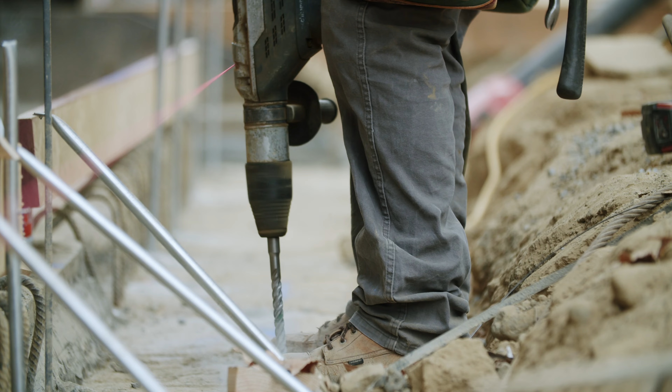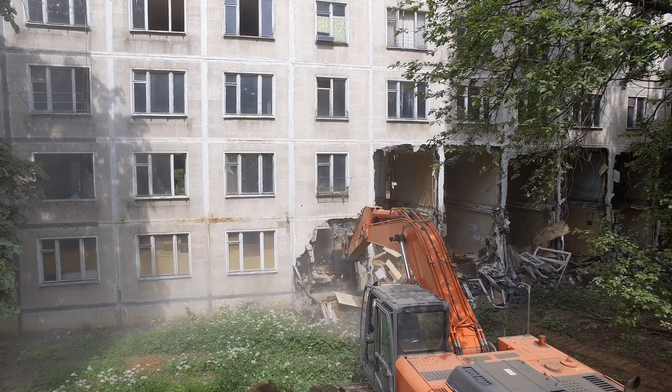When you think of a construction site, you probably think of this: big trucks, lots of noise, traffic jams, road diversions, dust, large cranes. In short, a few weeks, months or sometimes even years of nuisance and frustration for anyone who lives, works or travels through the area. And usually this situation is preceded by a lot of noisy and dusty demolition activities.

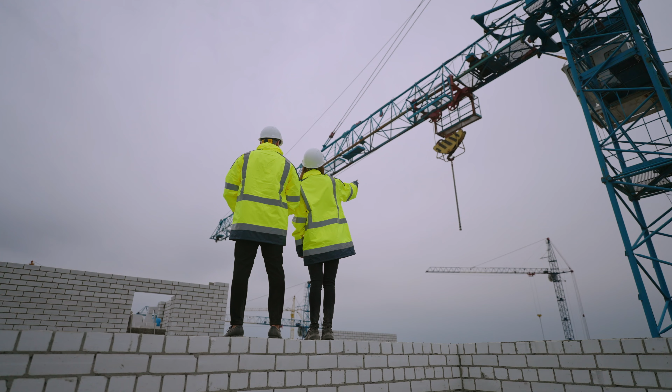Building on site has its downsides for construction contractors and building owners too, as it means all the building components are exposed to the elements, potentially being damaged by rain, wind, snow and sun. However, construction sites don't need to be that way.

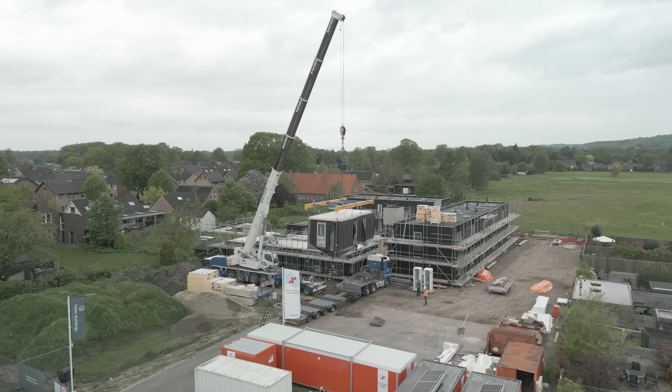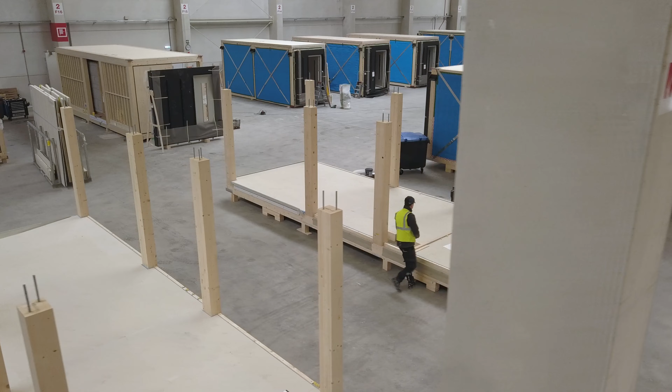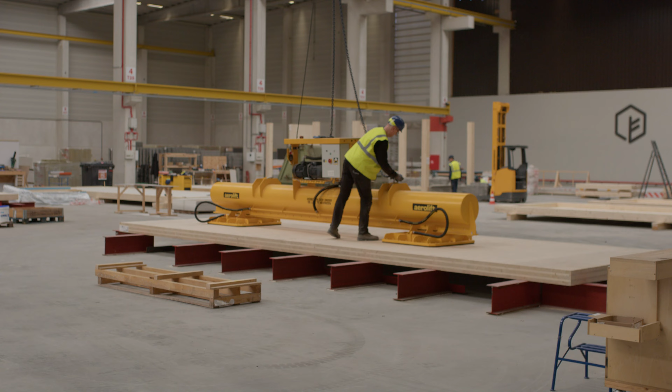Prefab construction enables us to construct buildings without the nuisance associated with traditional construction sites. In prefab construction, building parts are manufactured in a clean and efficient manner in a condition-controlled factory hall. They can be prefabricated as either a collection of 2D elements, such as walls, facades and floors, that are constructed in the factory hall and quickly assembled on site.

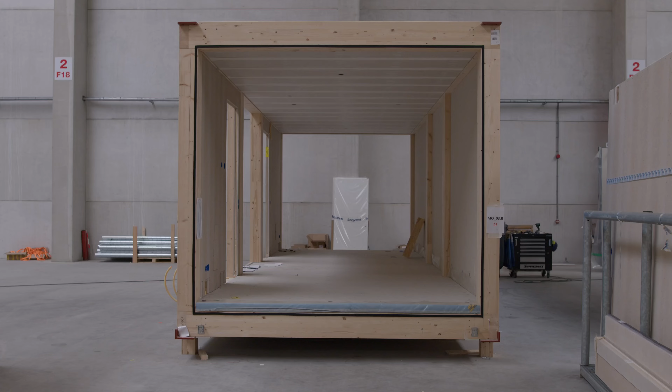Or we can even create 3D modules which already include all finishes, electrical fittings, sanitary units and, in some cases, fully fitted kitchens. This doesn't mean prefab housing has to look boring from the inside or outside. In fact, any finish is possible.

As timber is 5 times lighter than concrete and far easier to work with, it's a perfect material for prefab construction. This is why many new housing prefabrication factories are being built with a concept specifically based on timber. Let's take a closer look at how this is done.

Today we're at a modular housing factory of Lister Buildings in the south of the Netherlands. Here they produce multi-story buildings out of 3D modules made from mass timber.

Hello Vivian. Hey Pablo, good to see you and welcome at Lister Buildings. Well, thanks for having us. I understood you're going to give us a tour through the factory?

Yes, of course. Here we produce the modules made of mass timber to produce the multi-story apartment buildings. We have our own design team and the head of design is Robert, and he can tell you a lot more about the whole process.

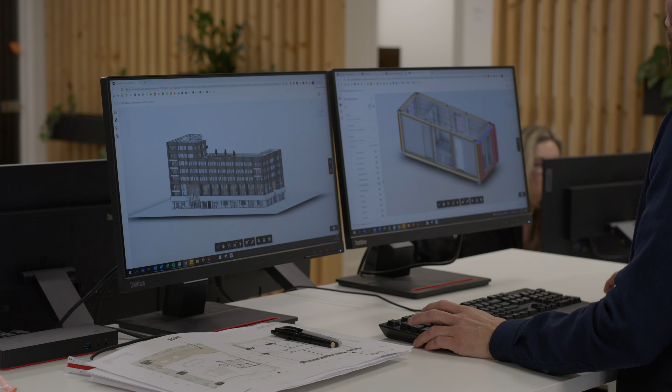Hey Robert. Hi Pablo. Hey, this looks really intriguing, what are you doing here? Currently I'm working on one of our 3D computer models for one of our projects. So we integrate all the information needed for the production process into our 3D computer models.

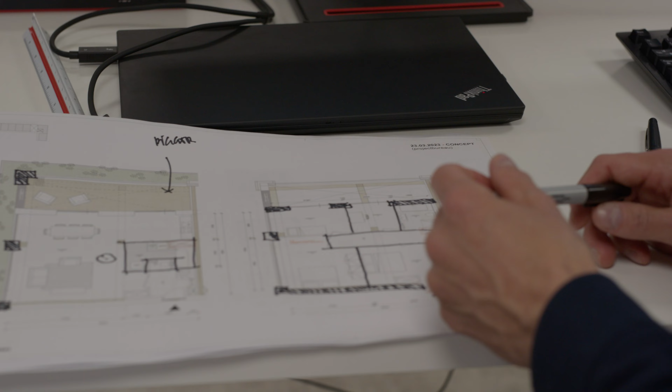But first of all we start with the sketches. We developed different kinds of floor plans for different groups of people, from students to young couples or small families to elderly people - mainly people who want to live in the city. But pretty quickly in the design process we start modeling together with our designers, engineers and production partners within the computer.

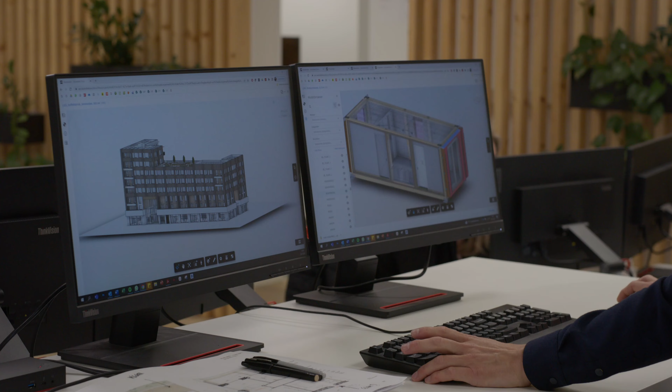And we do this in order to have a full span of control of the production process. As you can see here, we developed a fully integrated 3D model. This is the wooden post beam structure of glulam.

All our modules are made from dry mounted connections in order to be able to take everything apart at the end of the lifespan of a building. The dismountability. Yeah. This is the Koffiefabriek in Amsterdam, a multi-story timber building.

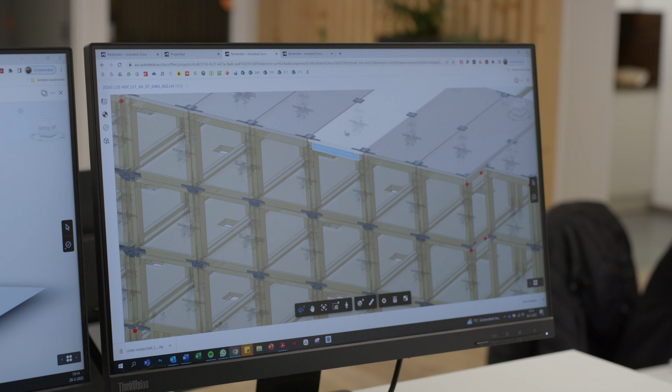We can build up to 10 stories high. And here this is the complete wooden structure of the Koffiefabriek. So these consist of all these kinds of 3D modules? Yes, it's 150 modules in total.

And you can see here we have all the posts and beams made out of glulam, and the floors are made out of CLT. And in total how many homes will be in the Koffiefabriek? 70 in total. Wow, and why did you choose specifically to build in the 3D system?

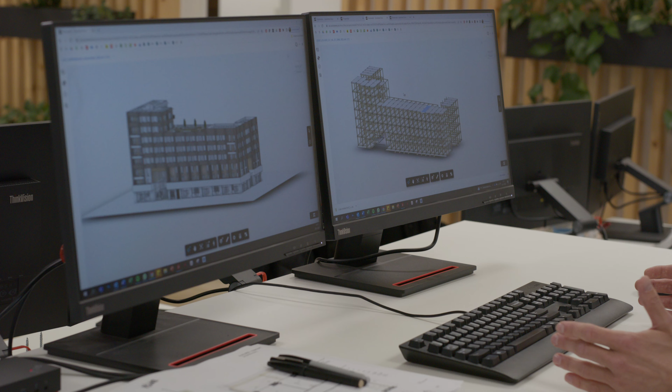Well, we built in a 3D modular system in order to have a full span of control, super good quality within our factory here in Weert, and to reduce all the assembly time outside on the building site. In that way we are able to build quicker, but also have less nuisance for the surrounding area. Wow, I like it a lot.

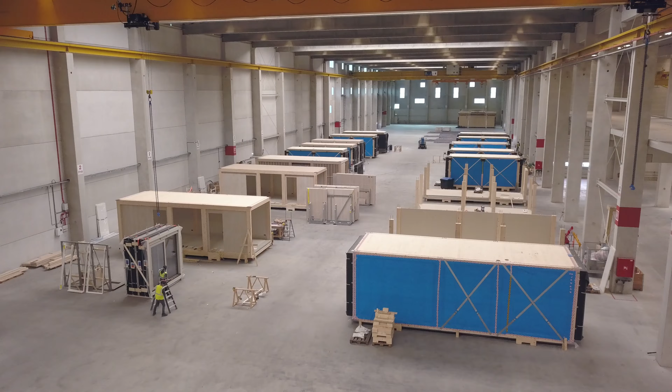So Vivian, this is where the magic happens. It's huge, how big is this hall? This hall is 18,000 square meters, and in the end we could produce more than 1,000 modules here per year.

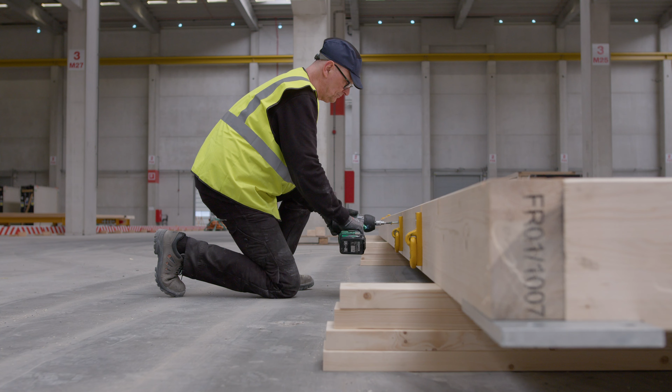What you see right here are the different working stations. In each station a specific team works on an element of the module. So what kind of elements, where do you start with? The flooring, and of course the posts and the beams afterwards, the ceiling, the wet areas of the module, the kitchen, the bathroom, the toilet.

And then every workstation does something specific. At the end of the day, our colleague from the storage room prepares all the materials for the next day, so the teams can start early in the morning, prepared with all the materials they need.

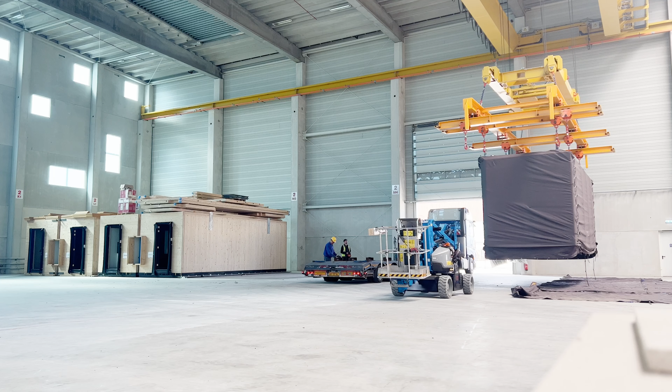And at the end you have a finalized module that goes on the back of the truck. Yes, exactly, to the building site. And then it's really amazing what happens there. You have a huge crane, it picks up the module, and within less than 10 minutes, the module is in its final position. That's amazing to see.

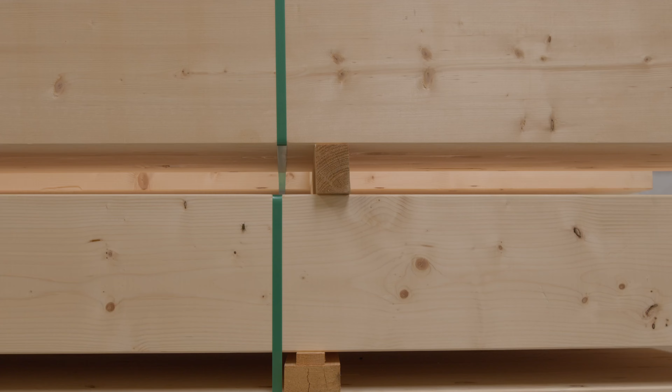We start here at the first step in the factory. This is the place where all the materials come in, and they are sorted out here. What you see here are the wooden elements of the module, which are designed and engineered by our partner CLTS from Belgium. They are experienced construction engineers of Glulam and CLT.

We also work together with Stora Enso, our supplier, and the design BIM model from CLTS goes directly to Stora Enso, and in their factory these elements are prepared. So what we saw in the BIM model that Robert showed us, all these elements and the sleeves are put there, sent over to the factory, and it comes plug and play like this. Exactly, and we only assemble it here.

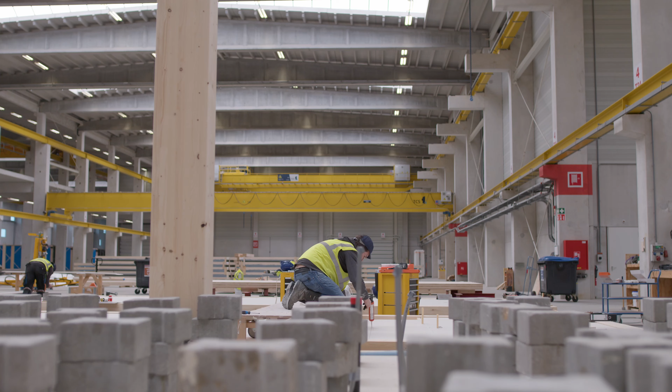Do you know where all this timber comes from? Well, Stora Enso has their own forests in Scandinavia, but also in Finland. And that's all with a sustainable certification hallmark? Absolutely. Okay great, good to hear.

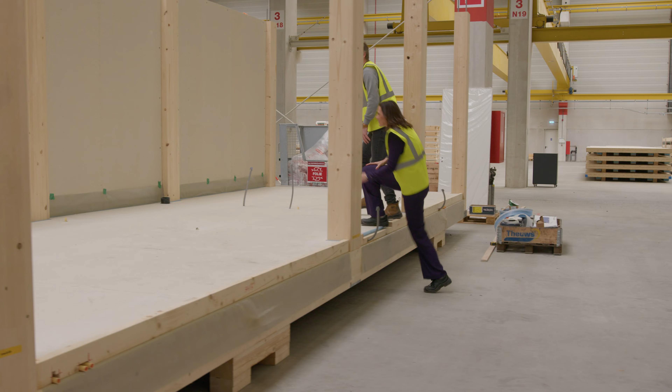Okay Vivian, so this is what a module can do. We saw the mass timber linear elements coming in, and here they're assembled in the 3D module. Absolutely, so we have the floor, we have the posts. The beams are not here yet, but they will come afterwards in the next working station.

The Glulam posts are really impressive, and you keep them inside in the final building. Is that a deliberate choice? Yes, because it adds to the aesthetic quality of the apartment, and we also know it's good for people's health if they have the feeling that they live in a building with natural materials. It's also in line with biophilic design principles, so it's really important for us.

Circularity is a very important theme nowadays in the construction industry. This 3D modular system of Lister, how does that score in terms of circularity? Well, circularity is one of the great benefits of our system, and for example we use dry connections and plug and play elements. My colleague Rick can tell you all about it.

He's our circularity manager. So Rick, hi. Good to see you here. So you're the expert, can you explain a little bit more, for example how circularity works on the Lister system? We actually make a circularity passport for every building that we make, and we score our building on 6 different topics, so we can have a nice overview of the performance of our circularity.

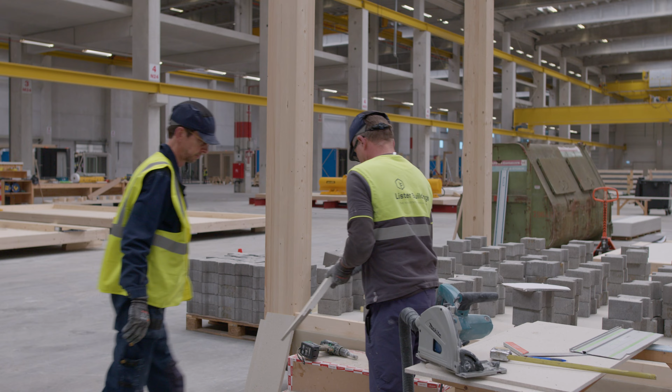Typically in these multi-story apartment buildings, you need to add mass to meet acoustic requirements, so usually they pour a concrete floor. So how did you manage that in the Lister system? That's why we use these kind of bricks. They are dismountable, so we don't pour any liquid concrete. This makes the system way more circular, and these bricks can be taken out after the whole module is disassembled.

Right, and so then you have the CLT floor that can also be reused, because they're not connected in a wet way. Exactly, that's another example of the circularity of our module.

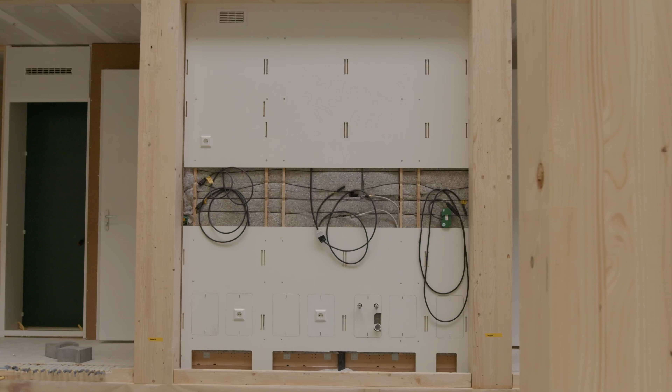But you mentioned there's also circularity included in this whole bathroom module. Yeah, you can take the whole bathroom out of the module. If you want to take it out, that's not a problem, and you can reuse the whole bathroom in a completely different way. And the rest of the bearing structure remains intact.

100%. Very nice. So this is our demo house, which is 3 stories high, but we can build up to 10 stories high with this structure.

And so the 8 modules that you used for this building, how long did it take to install them? In a couple of days we can put up the modules. Really fast, yes.

Well, I'm curious, let's take a look inside, shall we? Hey Robert, hello, how are you? Nice to see you in the demo house.

So here we see the 3D module in action, with its primary structure. As I explained to you earlier, our modules are created out of post and beams from glulam, and as you can see here, the ceiling is made from a CLT slab.

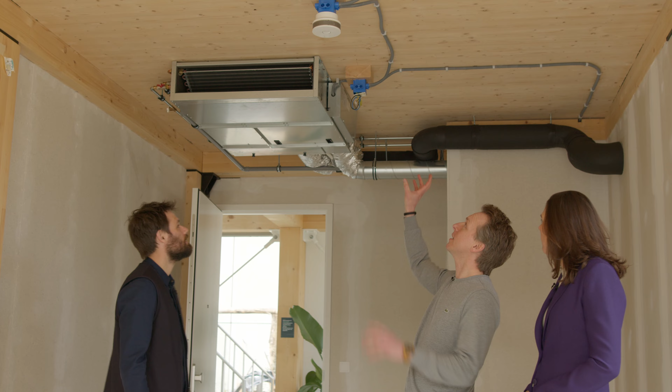Right, and the installations are just integrated and screwed on top. They're screwed on top, but they're all integrated already in the module before we go on site, inside of the factory. So Robert, what do we see here?

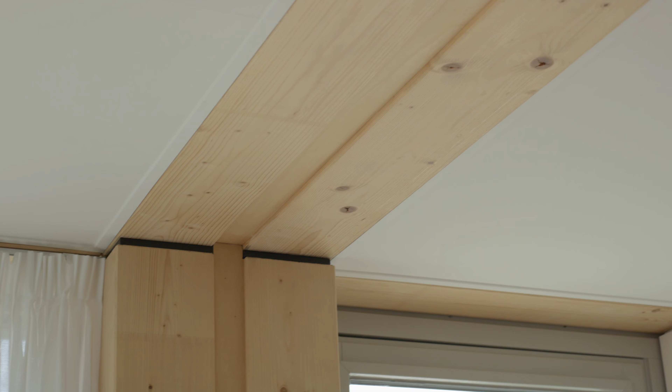Well, here in our apartment you see the biggest advantage of our post and beam structure. We're able to create open floor plans over multiple modules, and in that sense we're able to create bigger or smaller rooms according to the client's wishes.

And this is one module? This is one module, and this is the second module. Together they form a big living room, which is bigger than the standard module size.

Cool, so this is really a massive glulam post and beam system, completely fire safe. On top of this there's a CLT panel that you don't see, it's encapsulated, hidden behind the ceiling. We also integrated the installations in the ceiling, so in that sense we create a full, high quality apartment.

So how long is this fireproof, up to 10 stories high? 120 minutes. Great, according to all Dutch regulations. And I also really love the quality of it, what it does to the atmosphere in the room.

So Rick, we've learned a lot today. If you would give a wrap up, why should we build in such a manner? Yeah, so we can build here in controlled circumstances, of course. We don't produce that much waste. It's a lot safer actually for our workers, and of course it's a very nice environment to be in.

And the building process is a lot quicker as well, so we don't spend that much time on the actual construction site. Right, I saw it, the modules are finished here, put on the back of a truck, and then they come to the building site and it's plug and play. I like it a lot.

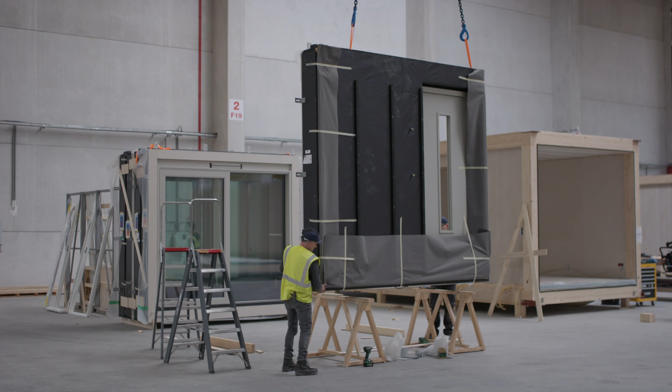Well, I've learned a lot. We have seen that the modular prefab timber home does not have to be bland at all. It can actually be a very pleasant and appealing home when the timber is incorporated sensitively into the interior design. Moreover, the prefabrication of the timber elements offers several clear benefits. I am convinced that bio-based modular construction is one of the best ways to tackle the housing shortage while still meeting climate and circularity goals.